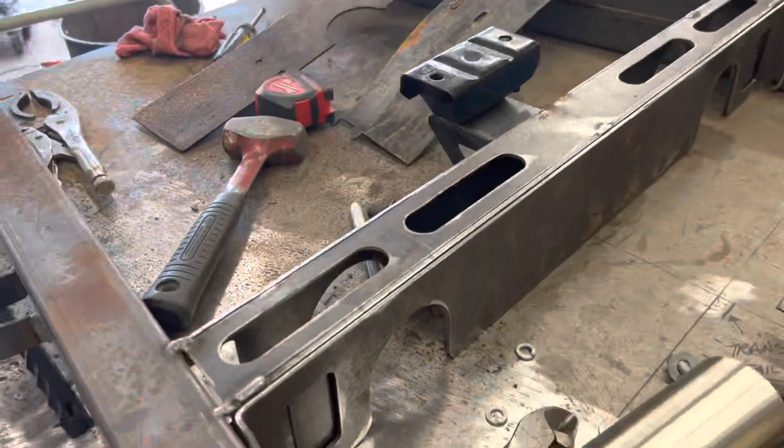All right guys, what's going on? Well, this evening I am working on getting this chassis underneath my beam.

I need to get the trolley, the hoist, and everything over the center line of this chassis, because basically where I'm at is I have reworked my transmission crossmember. I do need to build it up a little better. It's not finished, I just got two of the primary pieces done, and I'll show you that in a bit. But really my next step is I have to work on the front and rear axles and get them into place so I can build the suspension.

In order to do so, I am going to turn the table and use the hoist and the beam to move my suspension pieces, the front axle and rear axle, up into place. Really that comes down to me just hating working on the floor. I hate it. If I can work on my welding table and work up this high, I'd much rather get that done.

So this evening I'm going to clean up some stuff. I'll show you what I accomplished, and actually a little mishap I had with some stuff leaking from upstairs onto the table. And we'll move all this stuff around and see if I can't show you what we're doing with the suspension.

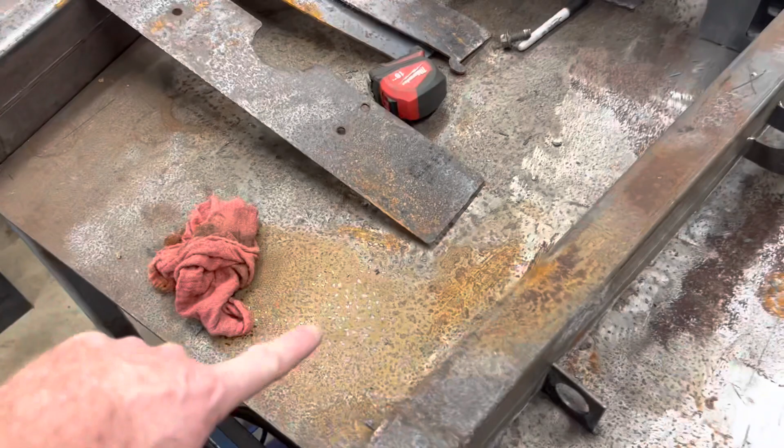So this was nice and fun. All of this rust that's here, it's just splattered all over the table. That all came from that spot right there.

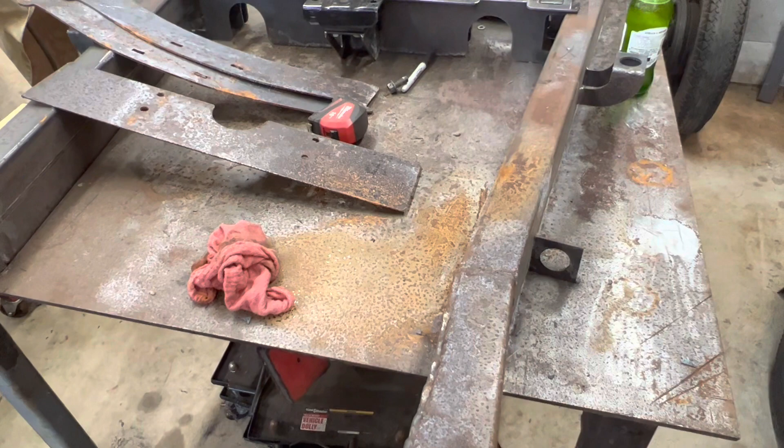What that was, and I didn't realize at the time, was actually a bottle of bleach, a 1 gallon bottle of bleach that some stuff shifted in a box. I didn't realize the bleach was in the box, and it basically crushed the 1 gallon jug and was leaking very, very slowly over the course of a couple days, and I came in to find this nice, pretty mess.

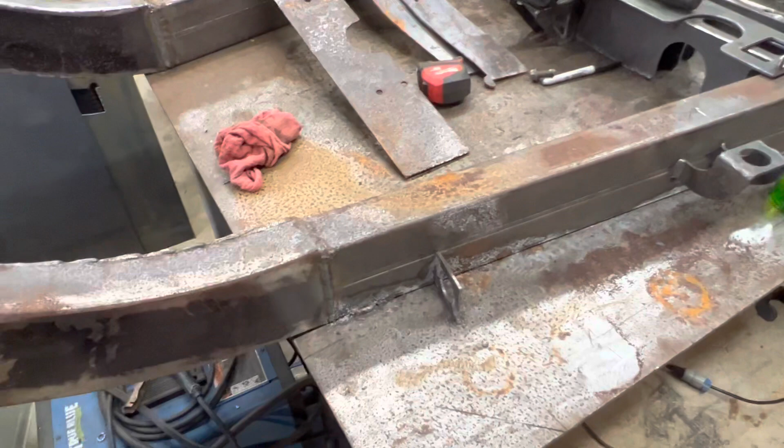So yep, now I get to clean all the rust off all this stuff. Fortunately some of it isn't needed, but I needed to prep all this stuff so I'm not terribly upset about it. It always pays to fix the problem when you first see it, because I saw that bleach, I saw something leaking in a box probably the day before all this began, and I should have stopped and fixed it. I was just in the middle of getting something else done, so now I get to clean up the mess.

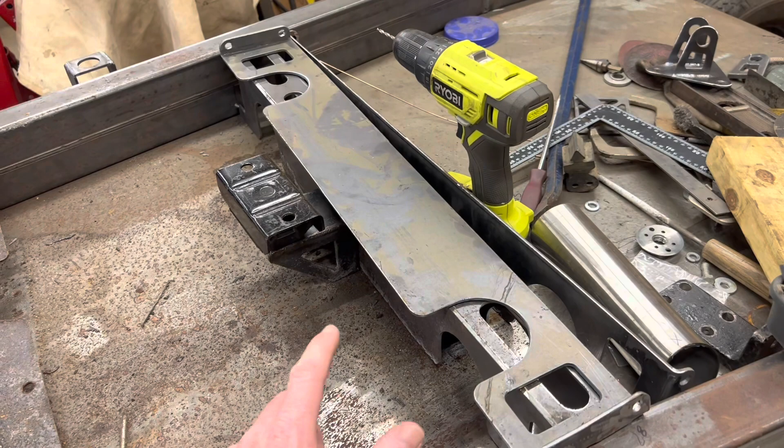So before I bother to clean all this stuff up, I'll show you where I'm at with the transmission crossmember. As you saw in the video earlier, I hand sketched this first, and then I went ahead and knocked it out real quick in Fusion 360 and made up some patterns for it.

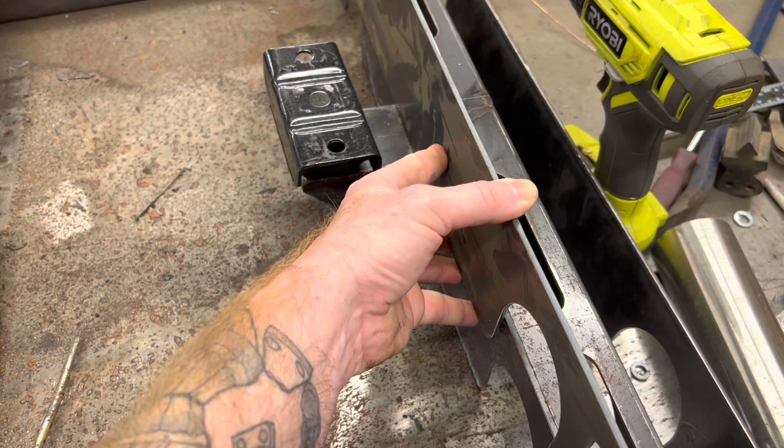Now where this is at and what will happen, this is going to be a replacement for this front crossmember, or the front plate of this crossmember. And if you look over here, it's inside the frame, it's inboard of the frame, and it's got holes in it. So I've done that to the front. This is the most forward piece of this crossmember, and I've also done the same to the back, or rearward crossmember, as well.

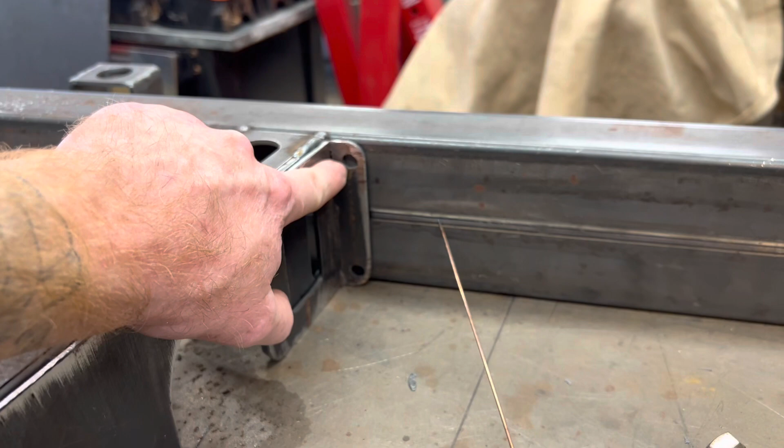So I'll be able to put some riv nuts in the frame. I'll drill into the frame and put some riv nuts in here on front and rear, and be able to bolt this whole crossmember in and out when I need to.

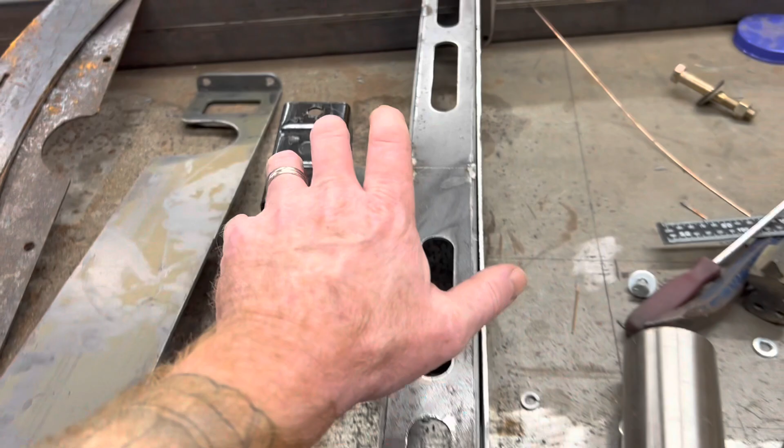And again, just to go back over why I would do that, my tunnel for my transmission in the sheet metal on the interior side that you're going to see is going to be super close over top of the transmission. So I'm going to leave it just enough to hopefully be able to put some heat shield in there, some sort of aluminum type of sound deadening, heat isolation stuff. And that all is in the name of trying to get as much foot room as possible.

But what that does is when you try to put an engine in at an angle, like you always have to, to get past a few other components, that will not allow the transmission, the bell housing portion of the transmission, to be up close to the top of the opening for the transmission.

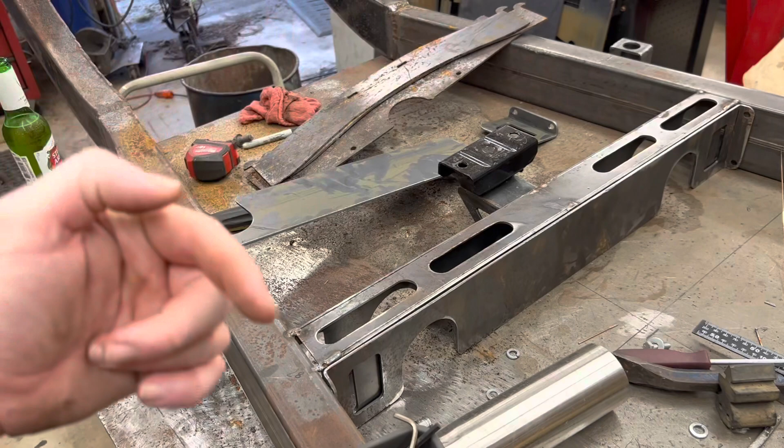So I'd like to be able to drop the tail shaft down in order to pull the motor out, and that will require this crossmember to be able to bolt out and come out of the car itself. So, I just need to touch on this because I realized I didn't actually include it in my other video.

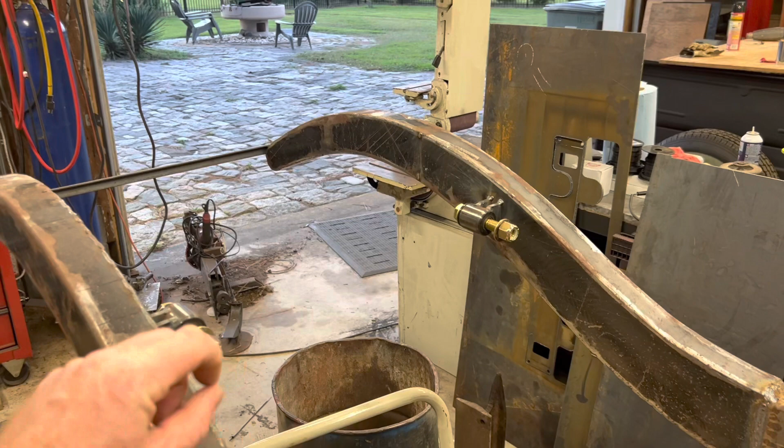The completion of the motor mounts, which I still have to finish welding. This portion, the steel housing for the bushings or isolators, is now welded to the chassis itself. This is the case on both sides, and I need to finish weld this. I'm probably going to TIG weld this.

I may very well plate the top of these things just because I cannot get inside of those, how tight they are. I can't get inside there and actually weld the inside. So I'll probably just box it all in, clean it all up so it looks nice.

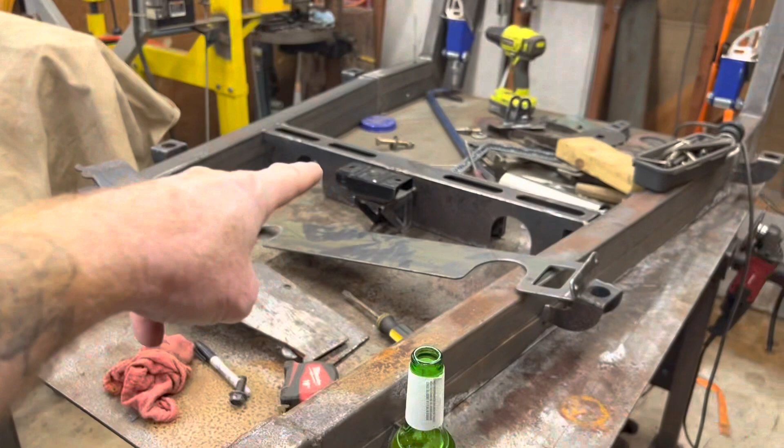So those did get completed. Those were set with the actual engine, the crossmember, transmission crossmember and mount in place. So all of the components to actually center the engine and set the engine height were in place when all of these mounts were set. Yep, that's where we're at with that.

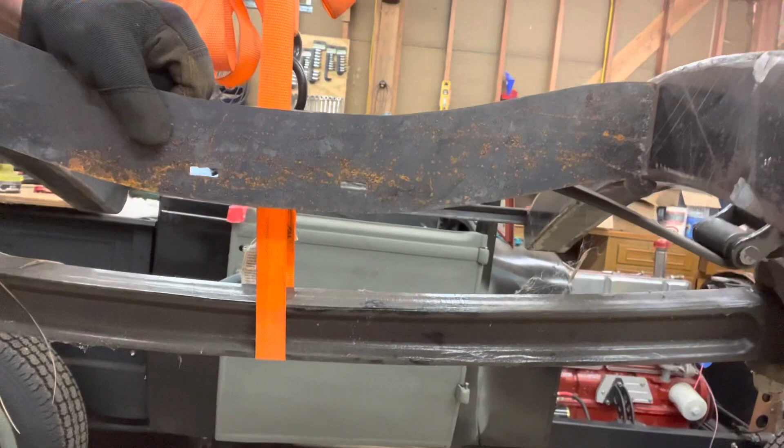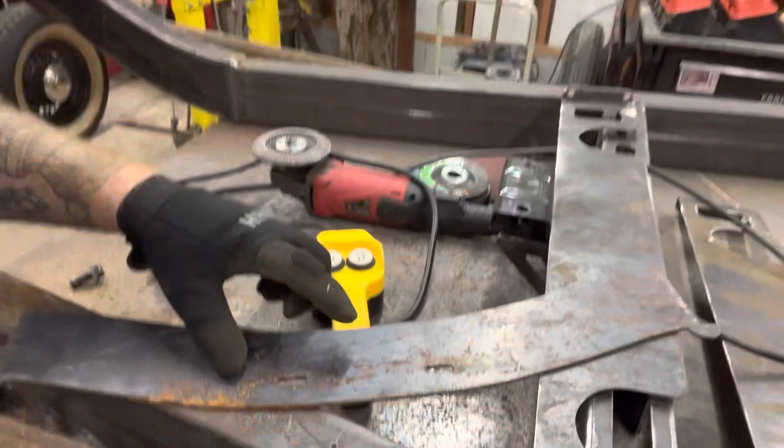Really what that is intended to be is my spring mounting surface, and I put it up inside by an inch so that I can hide shims, spacers underneath here so the spring will sit up inside this, and if I need to space it to get more ride height out of it, I can space it under here and you'll never see it. That's kind of where I'm headed with this, but honestly, I don't know how much

this spring is going to compress. So I can try to calculate all I want on this crossmember, but without probably a few test runs - tack this thing in, probably put these tabs on there on the ends like this

so that I can have it help support everything. And I could probably put the small block in there and maybe throw another 150 pounds worth of just BS on the front of it, just as a test to see how much the spring is going to compress.

I think there is some stuff on speedwaymotors.com like that - not a plug, I just want to say I've seen some stuff there that tells you roughly what to expect out of these springs. This is a single leaf front end, a monoleaf front end spring.

Yes Dylan, I know you don't want me to run it. I may very well not run this spring, we'll see, I've got to sort all that out. Again, this all comes down to the calculations of this front end. So I've got a little bit of work to do, a little bit of homework to get right in order to make this sit like I want it to.